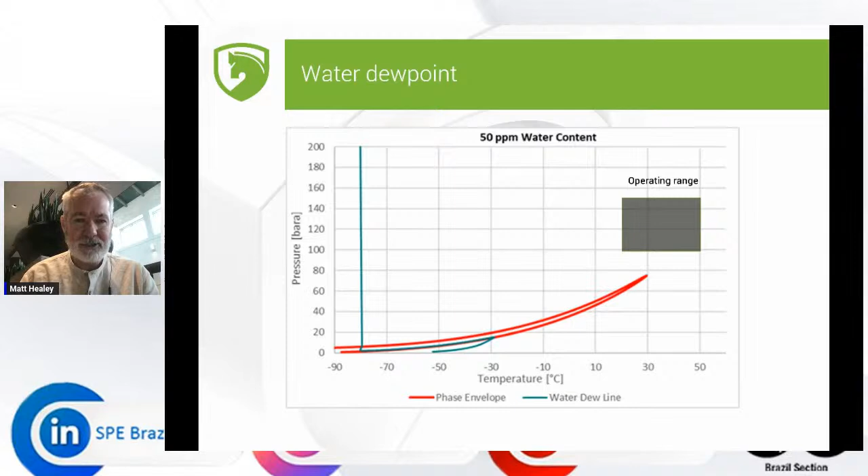Even upstream of the dehydration, so if we don't dehydrate the system at all, you're still operating in the dry range. So we've estimated that the water content is about 2,000 ppm before dehydration. And as you can see, there's still a margin of about 15 degrees between the operating conditions and the point at which you can get free water. And so what did they do? How did they end up with free water?

And the answer is they looked at a chart something like this, even though the system is designed, it's been through the HAZOP, it's been largely built, but they had what they call value engineering, where the key people on the project get together and they look for last minute savings. And they said, let's not put in dehydration. I don't think we need it. It looks like the CO2 coming out of our amine unit is dry enough. And if we don't have free water, then we don't have a corrosion problem.

Now, the engineers that I've spoken to, and I've spoken to quite a few of them who have worked on the project, the information that I'm presenting you is a mix of information that's already in the public domain and information that's been shared to me in interviews, which is why I'm allowed to share it with you now, because Chevron have never actually shared this information themselves. But I'm not giving you anything confidential.

But I can tell you that every engineer that I've spoken to has said, look, we didn't think this was a good idea. But then when you ask further questions, it becomes clear that the engineers were not able to explain why they felt that taking out the dehydration was a bad idea. And ultimately they were ignored. And so the management team and the lead engineers said, we can remove the dehydration unit. And they would have saved themselves maybe $5 million, maybe 10, something like that. So a significant amount of money, but nothing compared to what this decision ended up costing them.

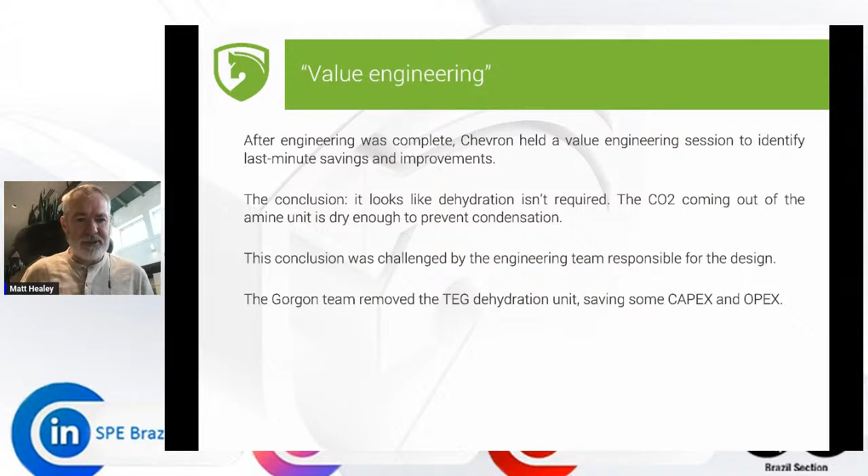So what happened? Well, they started up the system. The first thing they do is they bring in gas from the field. And they put that gas into the CO2 capture system. And then they commission the CO2 capture. And when the CO2 capture is commissioned and they're producing CO2, they then fill up the CO2 system with the CO2 gas, and then they go and commission their compressors. And what this means is that they have now just filled their system with CO2 gas during commissioning, which is right here in this range, right in the area where we get condensation.

What's happening here is that when the CO2 is a gas, it's non-polar. But when CO2 is a liquid, it is very slightly polar, which means CO2 liquid is much more effective at dissolving polar impurities like water than the gas is. And so even though the liquid would be dry, the dense phase would be dry, the gas phase is not. And so during commissioning, they introduced wet gas into their system.

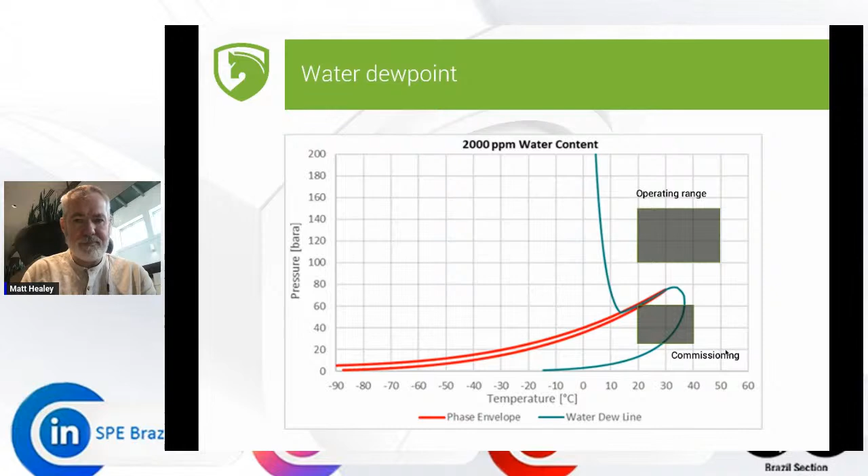Well, they didn't do it, because the operations team, not the engineering team, identified this issue a few weeks before startup. Our estimate is that if they had introduced this gas into their system, they would have had corrosion rates in excess of 100 millimeters per year. That's 10 centimeters per year. Their planned corrosion rate was less than 0.1 millimeters in 25 years of operation.

And the lesson here is that CCS is new, and that means that we need to be careful and creative about our engineering, because the people that design CCS systems either come from the oil and gas industry or they come from the gas transmission industry, which here in the US they call midstream. CCS is neither of these things, it's something different. And because it's something different, it means that there are these unknowns. And I want to talk about some of these unknowns, what we can learn from Gorgon and how we can apply this into design of systems in the future.

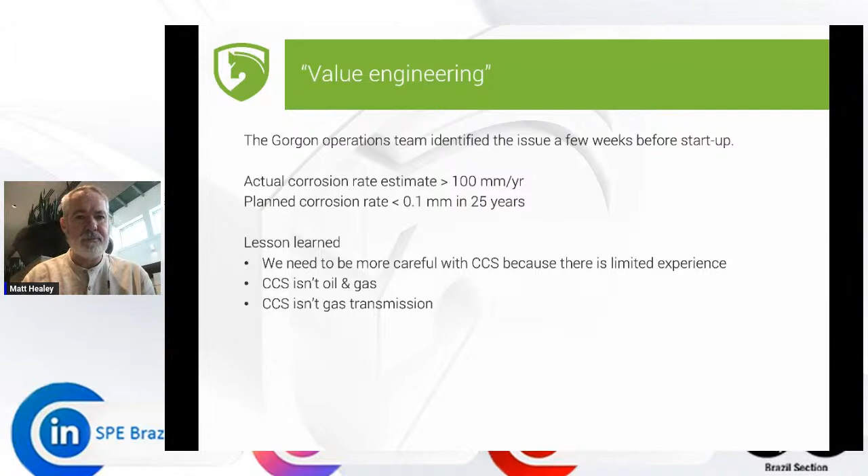The first is, here's something that doesn't happen in the oil and gas industry. CO2 comes with impurities. I've listed the common impurities there on the right. And these impurities can react with one another. Chemical reactions can take place. This has been proven in the lab in Norway. Us here at PACE, we've worked with Oxford University in the UK, and we've come up with a comprehensive list of all possible or plausible reactions. And then the outcome of our desktop research has been validated experimentally by other people in a paper, which I've seen but hasn't been published yet, but that's also coming from the IFE in Norway. So we can create new impurities.

Now, also, impurities that are polar interact with other polar impurities, and this includes water, which means that we're sitting here predicting water dew point. The actual aqueous phase dew point, which is the point at which you can get a corrosive liquid, is a different thing from the free water dew point. Now, again, this is something that we predicted, and this led to a design change on projects, and I'll show you on the next slide what that looks like. This has then been demonstrated experimentally, and we've seen some data from Shell in the Netherlands, which they also haven't published because that might be useful to people.

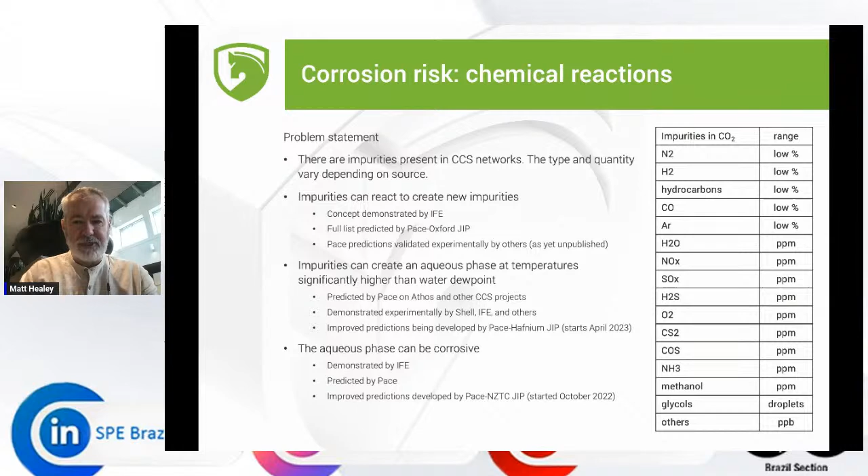And we're currently working on improving those predictions, because this is the sort of thing that we come across with CCS. It's new. And because it's new, we're having to discover new things that just don't happen in the industries that we come from, the industries where we have experience. And then finally, this aqueous phase can be corrosive. So again, this has been demonstrated in the laboratory, and I've got some exciting pictures to show you what that looks like. And at PACE, we've got a joint industry project where we're developing improved predictions so we can understand what's going on with these aqueous phases, including the products of chemical reactions.

This is the outcome of that work that we've done. These are the chemical reactions that we've identified. And if you take a look towards the middle of that list, you'll see nitric acid, sulfurous acid, and sulfuric acid. These are not things that you want in a pipeline.

The pictures that you see below start off with completely clean carbon steel and end up with some sort of brown dust. This is measured in the laboratory. This is the IFE's work, published in one of their papers. The difference from left to right is 20 days. That is rapid, aggressive corrosion.

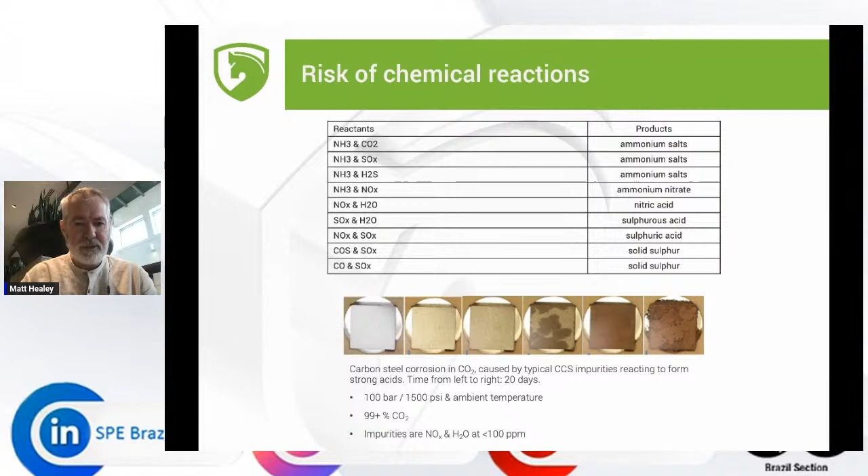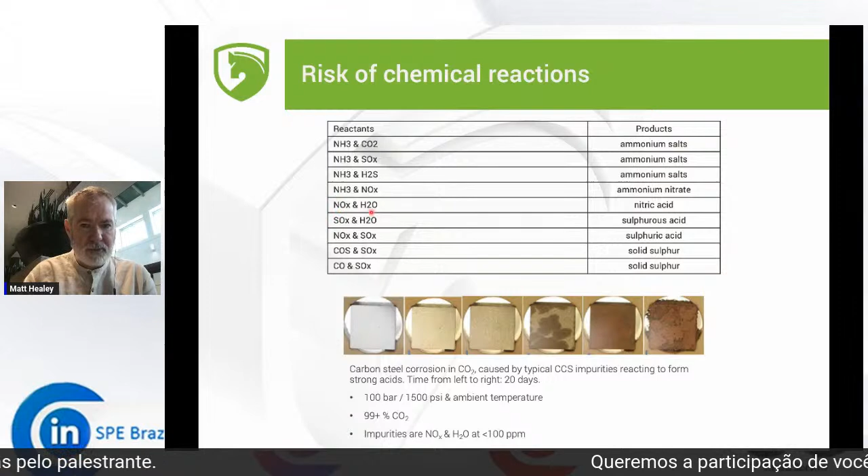Now, this happened at normal pipeline operating conditions, so ambient temperatures, about 100 bar. The composition has over 99% CO2. And the main impurities are NOx, in particular NO2, and water, but they're at low levels at less than 100 ppm. What's happened here is that they've had this reaction, NOx and water reacting in a CO2 medium, creating nitric acid. The chemical reaction creates nitric acid, and the nitric acid corrodes the carbon steel.

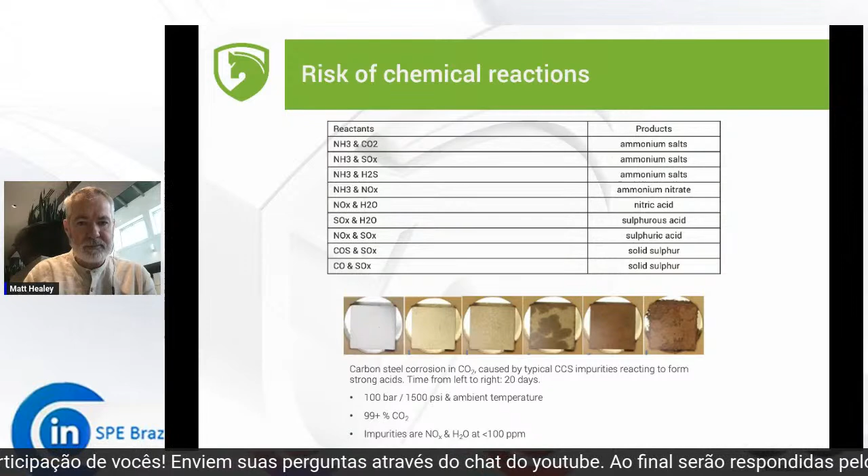That's not the only risk. Glycol, which we use for dehydration and is normally thought of as being a corrosion inhibitor, can induce a corrosion risk. I mentioned these aqueous phases. So this is, again, from a real project. This is our phase envelope again. This is the CO2 line, gas down here, liquid up here. In blue, this is the water dew point. As you can see, temperatures well below freezing.

But you add a tiny bit of glycol, just one little droplet carrying over from a glycol unit. Glycol is hygroscopic, which means that even though the water content in the bulk stream is very low, a droplet of glycol will draw water out of the non-polar CO2 gas into the polar glycol. And this dew point is now at or above ambient conditions, and this is a corrosive liquid, one that you will not see unless you consider the impact and the thermodynamics of these very small quantity polar impurities.

Now, this is a really different issue for corrosion engineers, because typically a corrosion engineer won't be too worried about transient operating phases like commissioning, and won't be too worried about tiny impurities in the droplet range, because we think about corrosion as something which happens cumulatively, slowly over a long period of time. On CCS, that's not the case. It can happen very rapidly, and the presence of certain impurities can induce a corrosive phase.

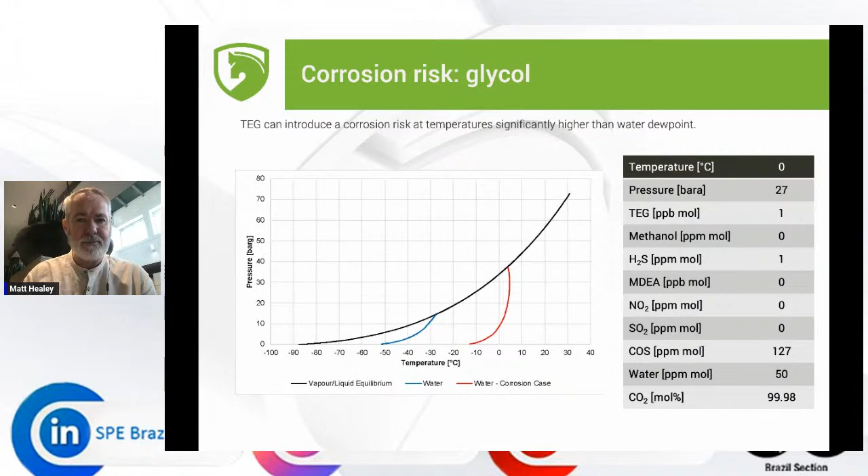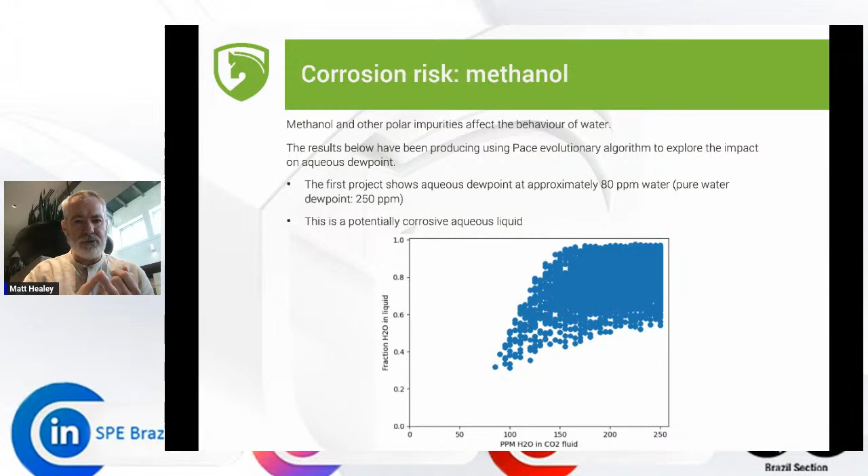So we're able to demonstrate with a bit of thermodynamics knowledge and clever data analysis that this is a corrosion risk which comes about because of the presence of another minor polar impurity. I've introduced several things on the same theme of corrosion with water: corrosion during transient modes of operation like commissioning, corrosion induced by chemical reactions in a pipeline leading to rapid corrosion, corrosion induced by glycol carryover from a dehydration unit, and corrosion induced by methanol, which interacts with the water to introduce a corrosion risk that would not be there otherwise.

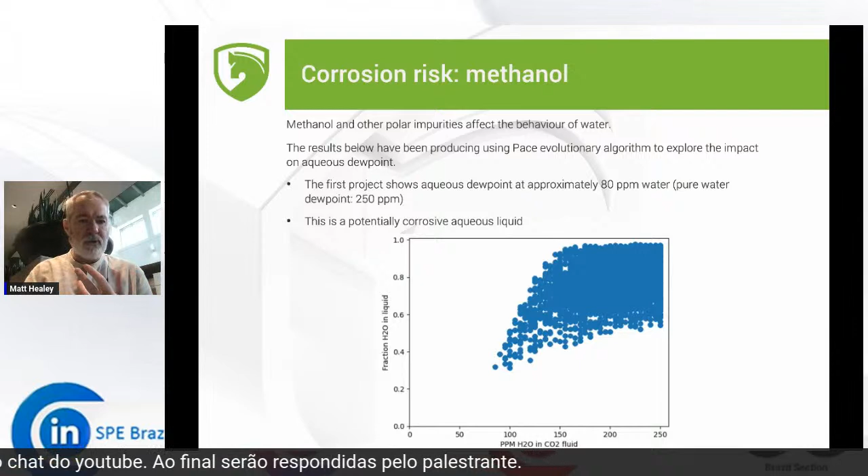All of these are really important to CCS, and all of these are issues that wouldn't normally come about in an oil and gas or a midstream system. And this is where we really need our creative engineering.

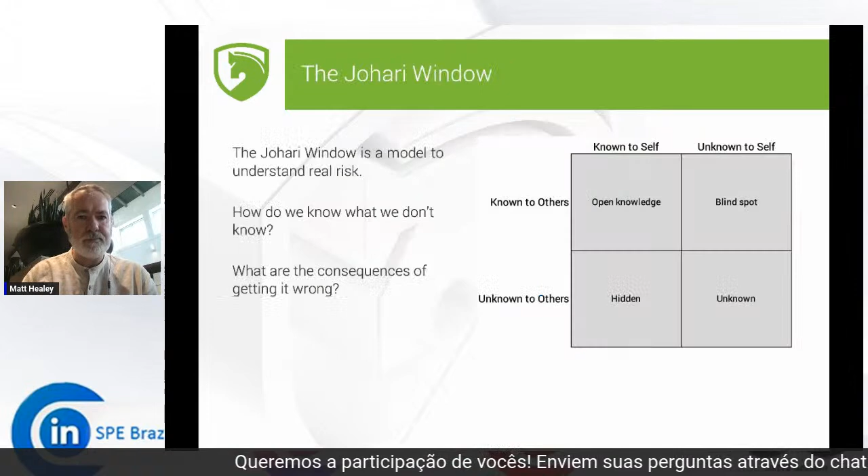Now, the solution here, this is the approach that we at PACE like to take. This is an idea called the Johari window. It actually comes from behavioral psychology, and it's a useful tool that gets used to try and understand ourselves.

So I'm sitting here talking to you. I'm the only person that's inside my head. Everyone else participating in this can look at me and sees me from the outside, which means that I'm the only person here that can't see what it's like to watch me do my thing. I can't watch myself. I can't hear myself. I can't tell really how this comes across. I'm just doing my best, but I'm at a disadvantage because I'm here inside my head.

Every single one of you has the same issue in that you are the only person that lives inside your head. Everyone else that you interact with sees you from a completely different perspective.

And what this means is that, oh, look at this. Speaking of, I said that people can't see inside your head. Someone has just brought me a beer. How about that? Outstanding. Perfect. I couldn't be happier. Where was I?

So basically it means that there are things in your head which are known to you and known to others, and so that's open knowledge. Now, the things that are known to me, because I'm inside my head, which are not known to you, these things are hidden to you. But then because I have a different perspective, there are things about myself that I don't know, but you do know.

And we'll all have a relative somewhere, a crazy uncle, someone who acts inappropriately in a social space. But you'll know that if you ever bring it to their attention, they'll deny completely that they're doing something wrong. They've got a blind spot. The psychological term is called anosognosia, and it means to not know, to be unable to know. The skills that someone uses to decide how to behave are the same skills that they use to decide whether or not they're behaving accurately. They're the same skills, and that's how this blind spot comes about.